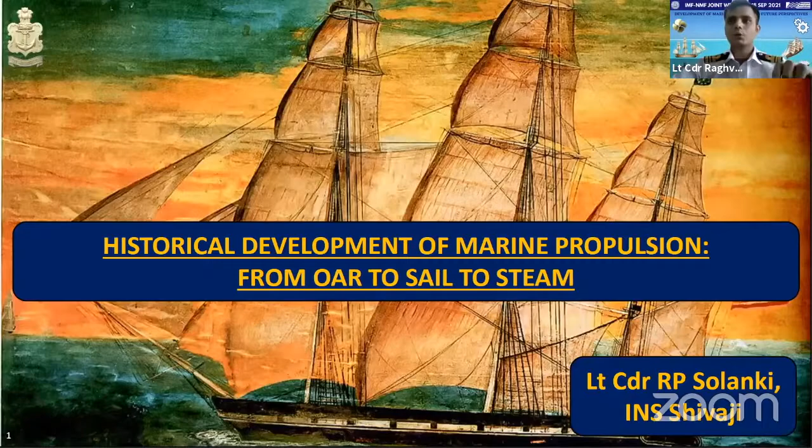The history of development of marine propulsion is filled with tales of great human endeavor and perseverance. I would primarily focus on the historical perspective leading up to the era of steam propulsion, from oar to sail to steam. The scope of the presentation is flashed on the screen.

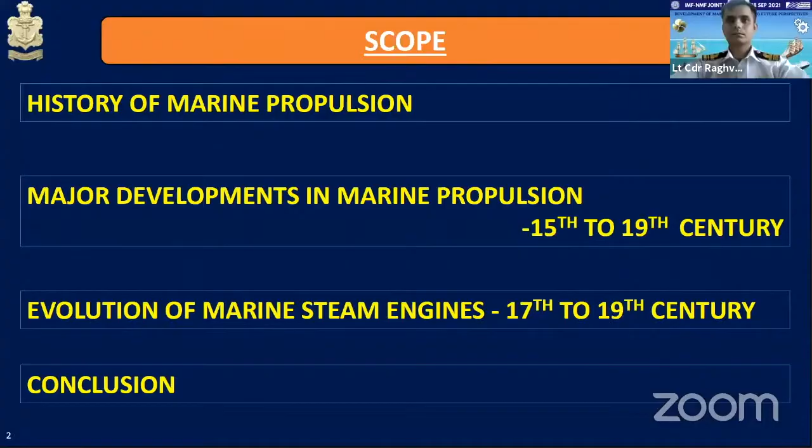First, I will briefly discuss the history of marine propulsion. The earliest historical evidence of the existence of boats has been found in Egypt, dating back to the 4th millennium BCE. Egypt's culture was completely riparian as it existed along the river Nile, and all requirements of the civilization were met by transport through the river.

Because they were confined to the Nile and dependent on winds, recourse to rowing during lull periods was essential. Early Egyptian boats had a single square sail along with one row of oarsmen. The role of the ship defined the design criterion, which still stands to this day in classification of various ships. Fighting ships required speed and adequate space for a substantial number of fighting men. In contrast, the requirement of trading vessels was to carry maximum quantity of goods along with minimum crew.

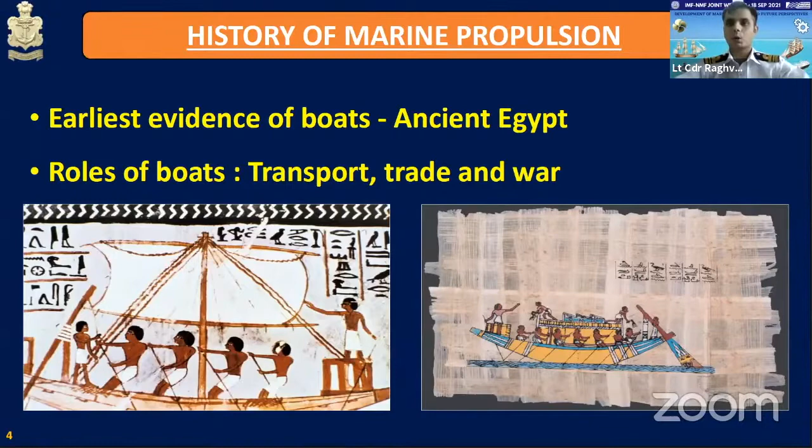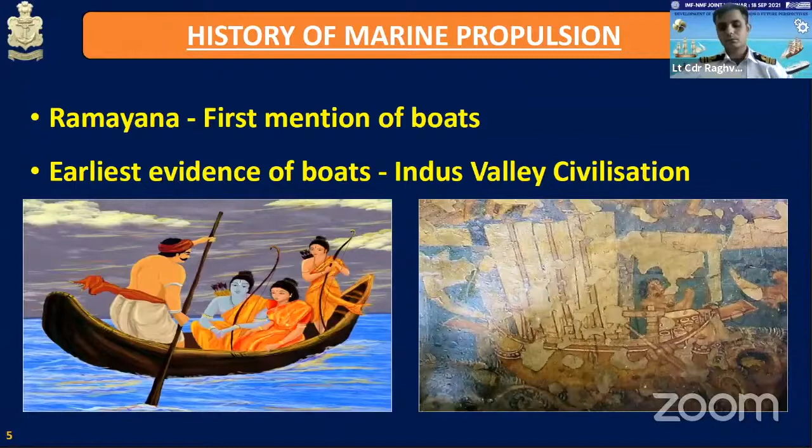As per Indian mythological records, evidence of boats was first mentioned in the Ramayana, where Kevat transported Lord Rama across the river Ganga. As per history, shipbuilding in India goes back to the 3rd millennium BC to the Harappan times, during the Indus Valley civilization. The Harappans built the first tidal dock of the world at the port town of Lothal in about 2500 BC.

By about 200 BC, oared ships were built in larger and larger sizes in the Mauryan era. The wood used was mainly Malabar teak, which was superior in durability. When trade winds were discovered, multi-oared galleys gave way to sail ships.

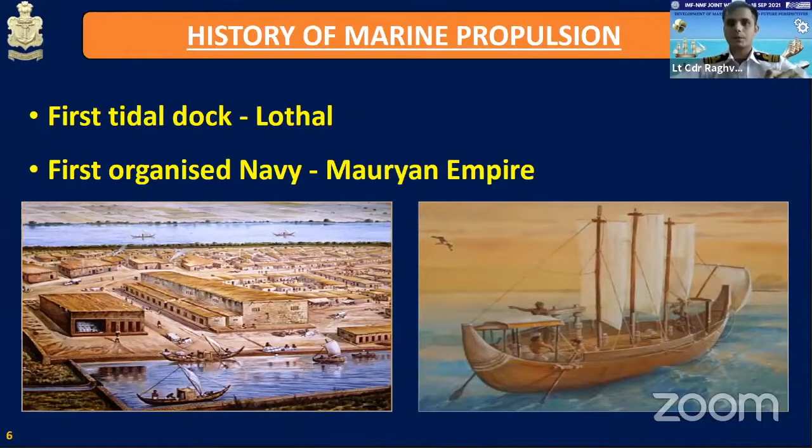Skill of navigation with the use of sails was being discovered in the early centuries, where sailing under following winds was only known to a few seafarers. To achieve better speed, more masts and more sails were required, which provided stability to the ship but also covered larger deck spaces. Two types of sail, the square and the lateen, were extensively used. Various combinations of sail were tried by seafarers over the centuries, but more often, the second mast always carried a square sail.

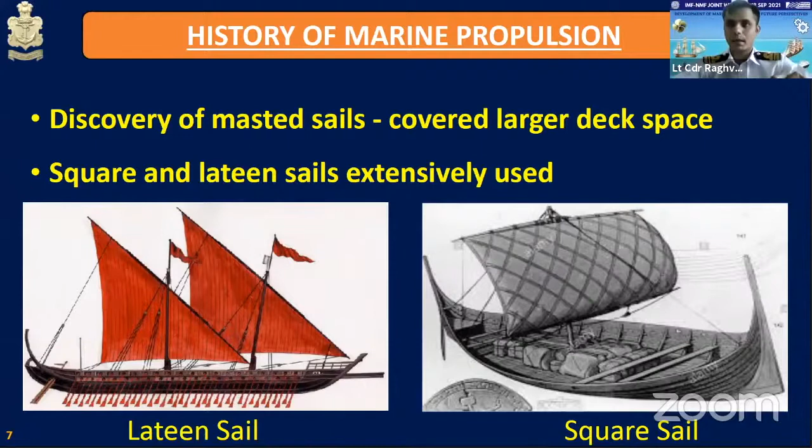The Portuguese are credited with introducing guns on board ships that were constructed in India. The shipbuilding style of the Portuguese was greatly followed by the Marathas in the 17th century. The Gurab and the Gallivat were two prominent fighting vessels of the Maratha Navy. The Gallivat had two masts with a lateen sail and benches for oarsmen. The first keel of the Maratha Navy was laid near present-day Kalyan.

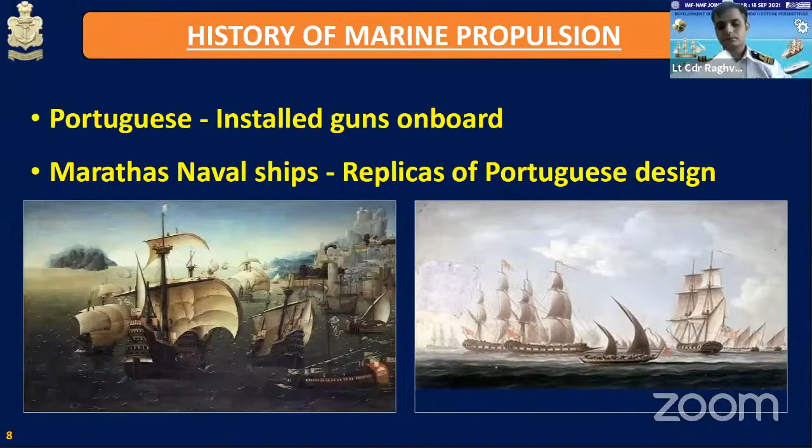During the 18th century, the Parsi community became pioneers in shipbuilding. They built various ships for the East India Company and mastered the art of shipbuilding. HMS Trincomalee, built by the Wadias in 1817 for the British Navy, is still afloat at Hartlepool, England, and is testimony to India's traditional shipbuilding prowess. The Wadias also developed sites for construction of ships at Surat, Daman, and Bombay.

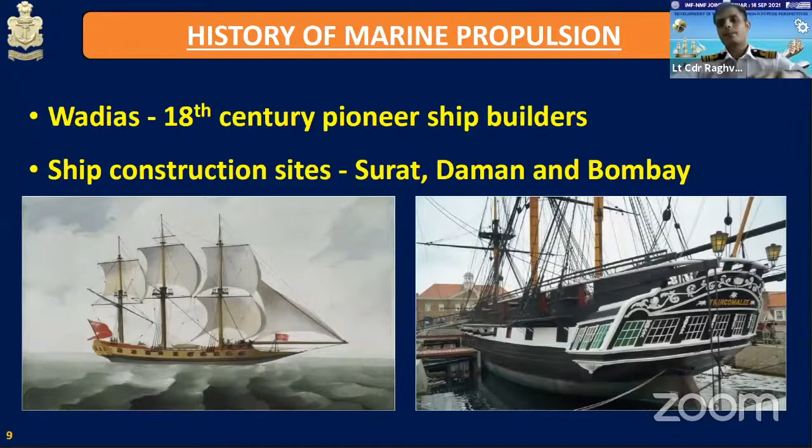Shipbuilding had also developed in China by 1100 AD. Chinese ships were better in design as they provisioned for a rudder along the keel at the stern of the ship, which provided better stability and control.

In rigging, Chinese ships were far ahead of the Western ships, with sails made of narrow panels, each tied to a sheet at each end, so that the force of the wind could be taken in many lines rather than on the mast alone. By the 15th century, Chinese junks had developed into the largest, strongest, and most seaworthy ships in the world. Not until about the 19th century did Western ships catch up in performance to these.

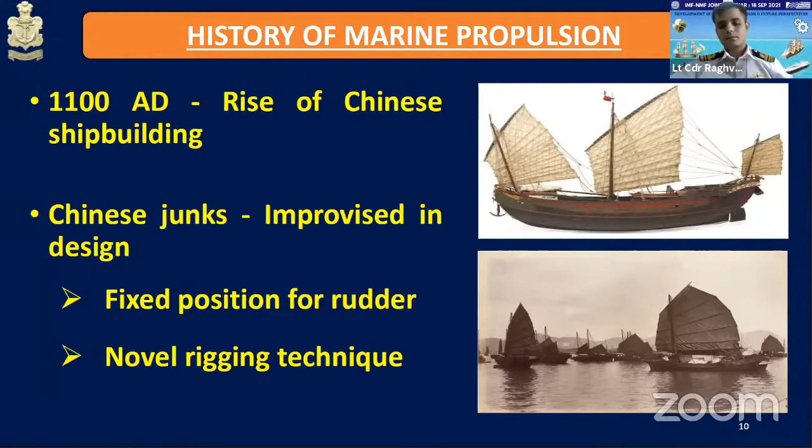Major developments from the 15th to the 19th century will be discussed in subsequent slides.

The early 15th century saw the rise of full-rigged ships because trade was becoming larger in scale, more frequent in occurrence, and more distant in destination. To achieve greater speed, multiple masts with more canvas of sails were added, which made them capable of covering larger distances. To accommodate additional masts, the hull became elongated.

During the 16th century, carracks, which were Mediterranean three-masted ships, were largely in use. As the years passed, the galleon, which never carried oars and was likely to be four-masted, became the most distinctive vessel. During the 17th century, vessels were commonly three-masted in Northern Europe.

The Dutch, competitors of England, were able to build and operate merchant ships more cheaply with half of the crew of English ships. In the 17th century, the sailing ship in general service was predominantly the Dutch fluyt, which made Holland a great maritime power.

In the 18th century, England re-established its prowess over sea trade by extensive studies on material of sail and enhancement in design of the box rudder.

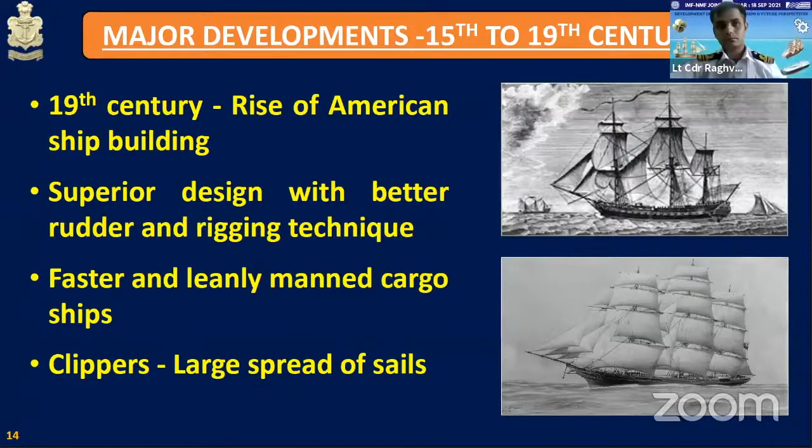Although the use of sails for commercial purposes was phased out by the beginning of the 20th century, leading navies of the world still operate sail ships to impart training to their men.

The Indian Navy also operates two sail training ships, INS Tarangini and Sudarshini, for providing sail training experience to officer cadets. INS Tarangini, commissioned in 1997 and built by Goa Shipyard Limited, was the first Indian naval ship to circumnavigate the globe. Indian naval officers have also circumnavigated the globe on Indian naval sailing vessels Mhadei and Tarini.

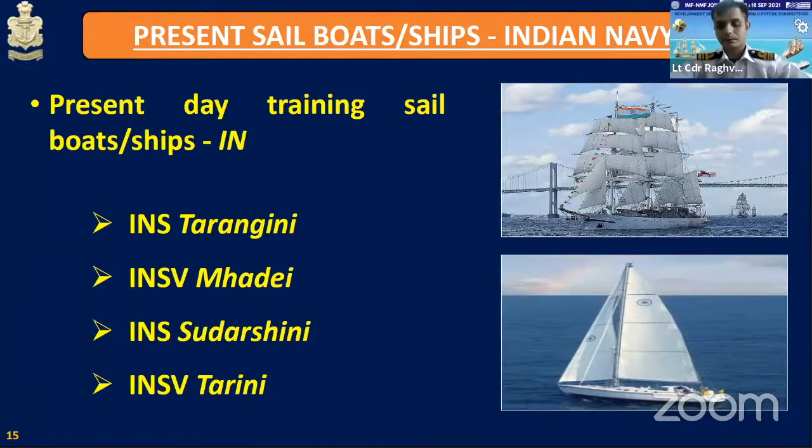Moving on to the evolution of marine steam engines between the 17th to the 19th century.

The main drawback of the sail ship was that as ships grew larger to cater for more cargo, the sails along with handling equipment also grew bulkier. This became cumbersome and problems arose in reliability and maintainability of equipment, thus triggering research in other forms of propulsion.

Along with the discovery of various properties of steam as main propulsion, the design of propeller was also being conceptualized by scholars. Among the first batch of designs, paddle wheels driven by steam engines made their way as propellers for ships in the 18th century.

Initially, two designs of paddle wheel, straight paddle and rotary paddle, were developed. Screw propellers, which were designed by Colonel John Stevens in 1804, faced multiple problems in their initial days.

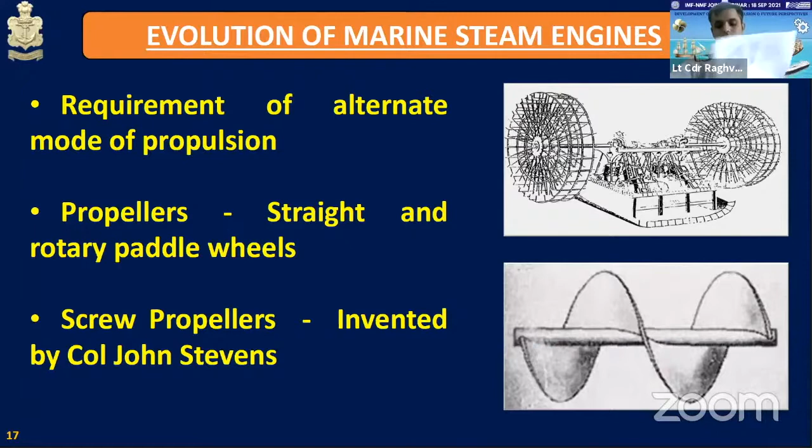The history of the steam engine is linked with the invention of the steam pump. The steam pump was marinized and adapted for use on board vessels as the steam engine. The founder of the steam engine was Thomas Savery, who invented a steam pump that was extensively utilized in the mining industry and was also known as the friend of the miner.

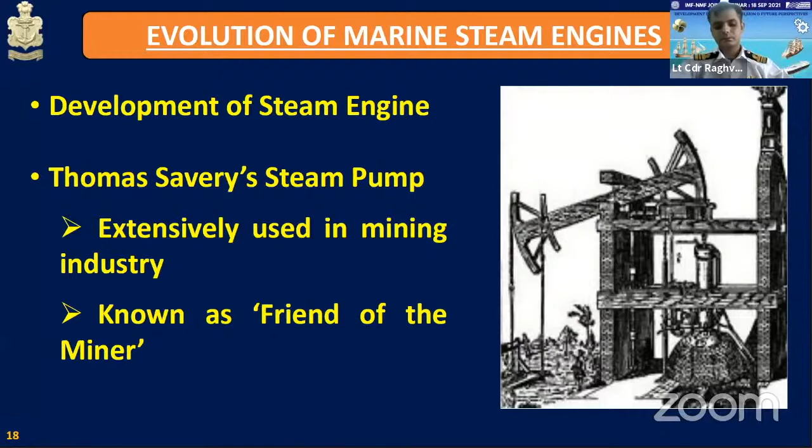Savery's design was upgraded by Thomas Newcomen, whose engine had better efficiency. The engine was self-acting in nature and had an added feature in the form of a condenser that considerably improved its fuel efficiency.

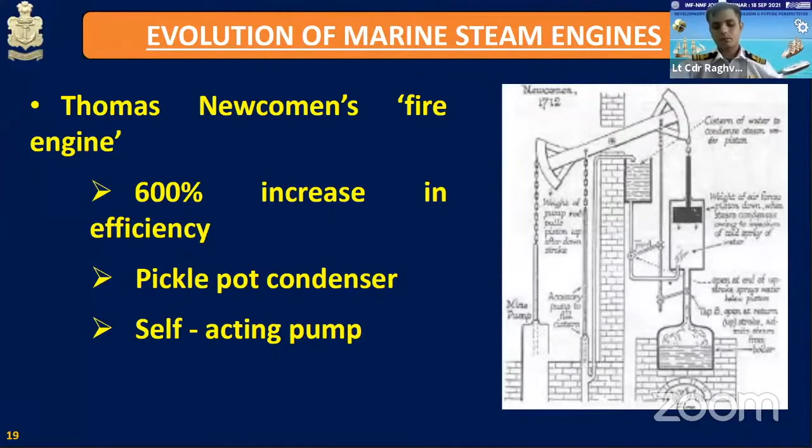James Watt is credited for developing the steam condenser engine in 1765. This was an improved version of Newcomen's fire engine. Watt developed the pickle pot condenser, which was later replaced by the common jet condenser in 1800. This engine, which utilized vacuum underneath its piston, had better fuel efficiency than previous engine designs.

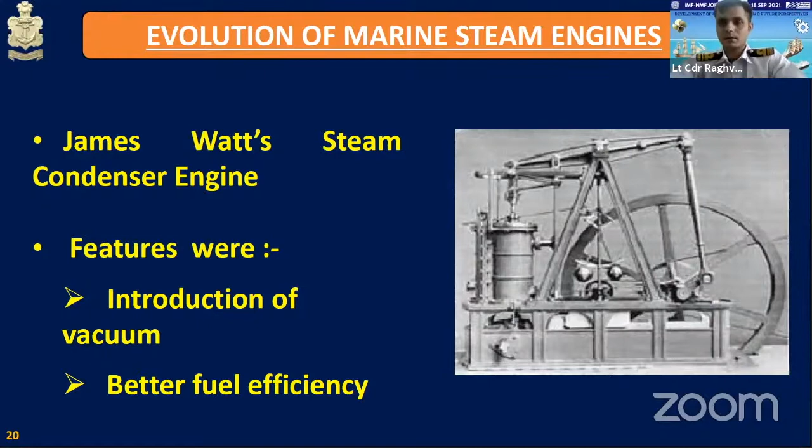On August 9, 1803, Robert Fulton, an American, made history by successfully completing river trials of a steamboat on the river Seine at Paris. The steamboat operated at 3 miles per hour. Fulton utilized James Watt's patented steam engine and coupled it with a rotary paddle wheel for propulsion.

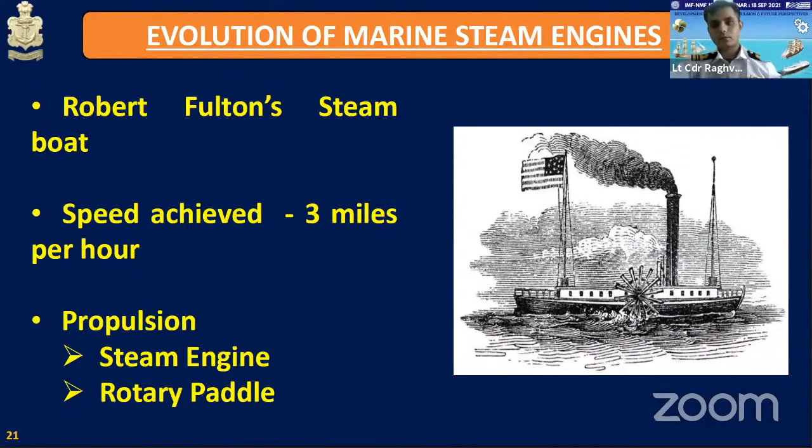In 1819, the Savannah, built by Savannah Steam Ship Company in New York, became the first ship to successfully cross the Atlantic Ocean. The ship was propelled by sails and paddle wheels powered by a steam engine. The engine powered the paddle wheel for a total duration of 85 hours.

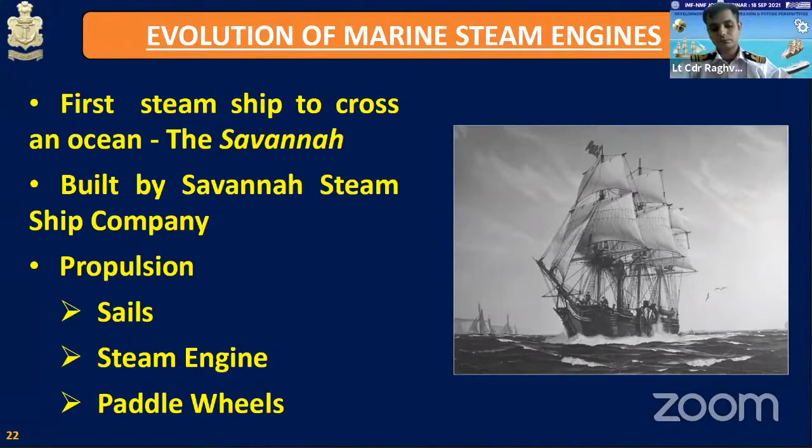The first marine steam engine for cross-Atlantic liner ships was developed by I.K. Brunel in 1838. This engine was installed on board the Great Western, a cross-Atlantic liner of the Great Western Steamship Company. The engine was operated on a low boiler pressure of 5 psi and developed 450 nominal horsepower. The propulsion system of the ship consisted of a steam engine, sails, and paddle wheels.

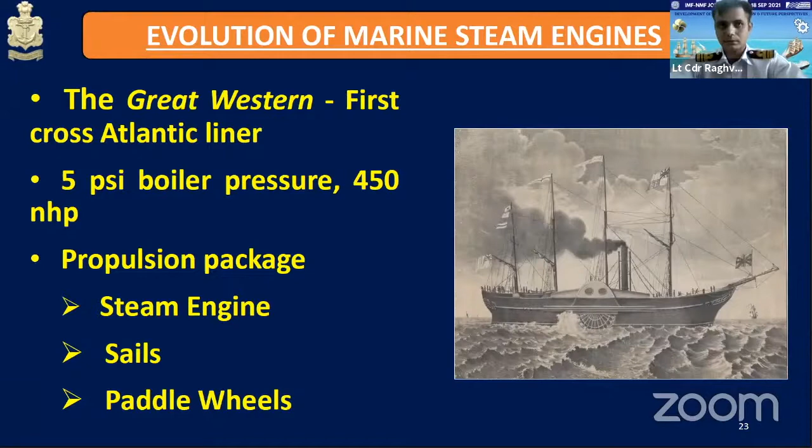The Great Britain was the first iron steamer to cross the Atlantic and was built by I.K. Brunel for the Great Western Steamship Company. The ship was the largest of its time and was propelled by a steam engine connected to a screw propeller. An auxiliary sail was provided for additional power.

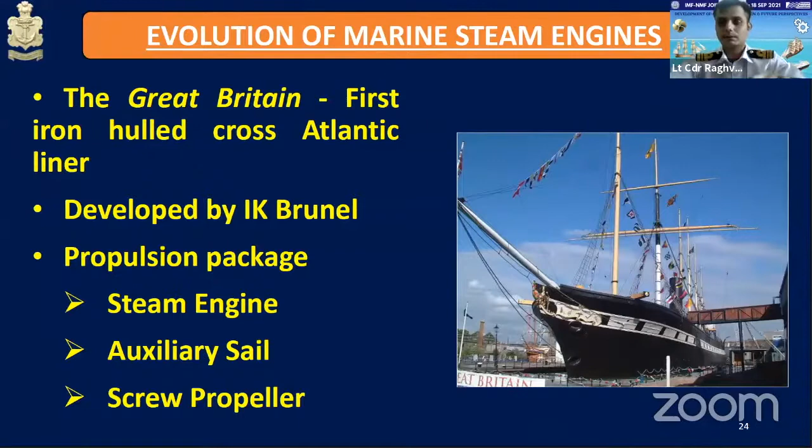Some of the design challenges associated with initial designs of steam engines are requirement of a large engine room as the engine size was not compact, use of only heavy cast iron in engine construction due to insufficient knowledge of metallurgy, problems in connecting pistons and cranks as the technology of bearing materials had not developed, slow rotational speed due to low boiler pressures, high consumption of fuel, and lack of skilled operators.

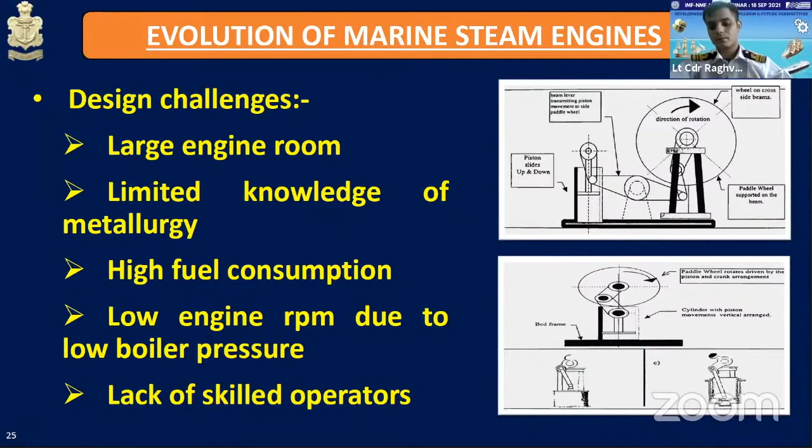Sir Charles Parsons is credited with the invention of the steam turbine. He first developed a turbo generator in 1884. This made way for the development of the steam turbine.

With the induction of the turbine, the speed available was high, necessitating changes in the reduction gear arrangement. The advantages of steam turbine over reciprocating steam engines were generation of tremendous amount of power with fewer parts, high power to weight ratio, and exceptional efficiency.

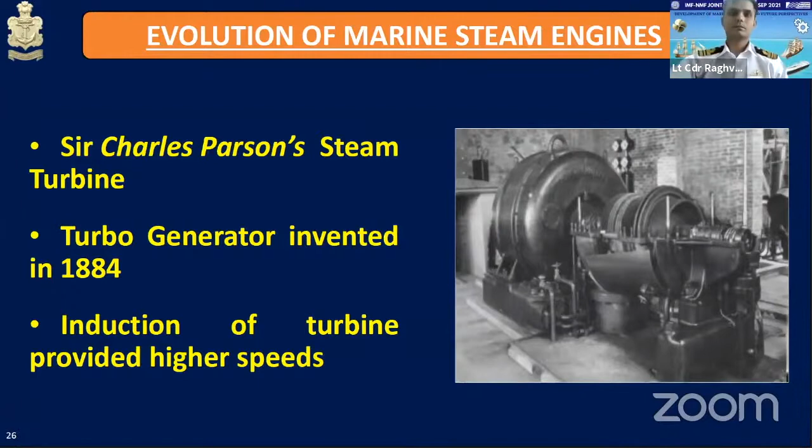The first steam turbine was installed on board SS Turbinia. This radial flow turbine rotated at 2000 rpm. After several trials and improvements, she clocked 35 knots. The propulsion system of the ship consisted of a water tube boiler, radial flow turbine, and screw propeller.

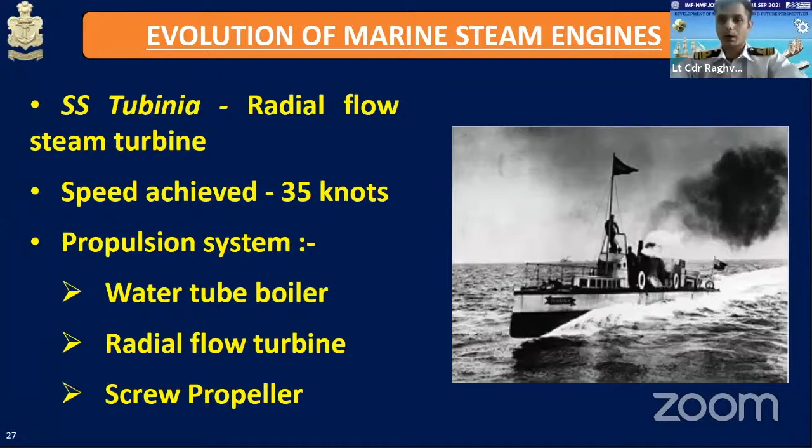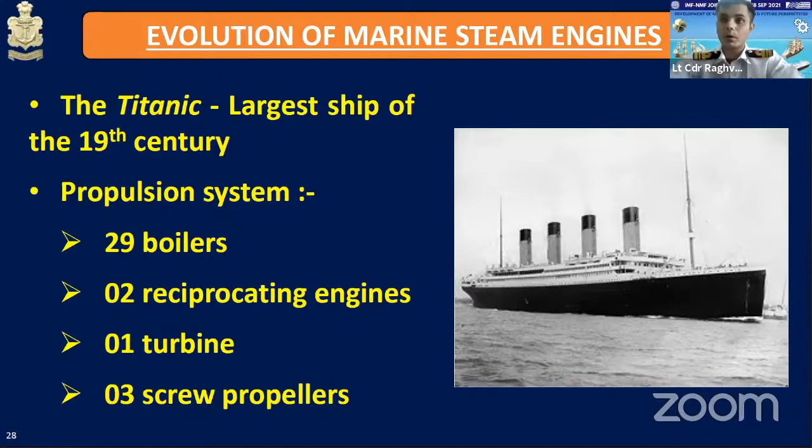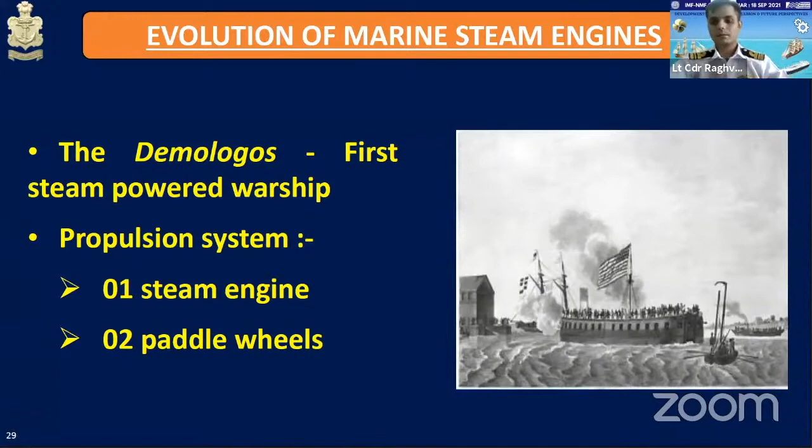Construction of the Demologos paved way for shipbuilders across the globe to develop warships propelled by steam power. Steam propulsion gave warships additional speed, mobility, and maneuverability, thus enhancing the strategic power of maritime forces. Mighty warships, which fought in both world wars, were the greatest example of efficient use of steam-powered engine. Steam propulsion systems have evolved over the course of time and are even today in use by world navies.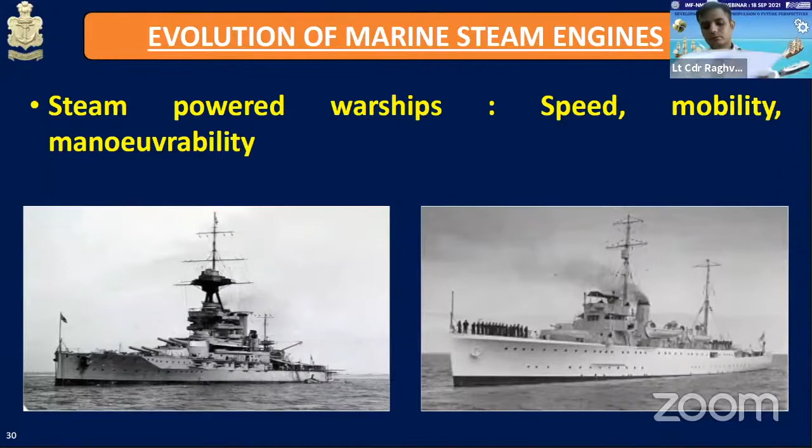The Indian Navy too had operated a number of steamships, including aircraft carriers Vikrant and Virat. This technology is still used on many frontline warships, including the aircraft carrier Vikramaditya.

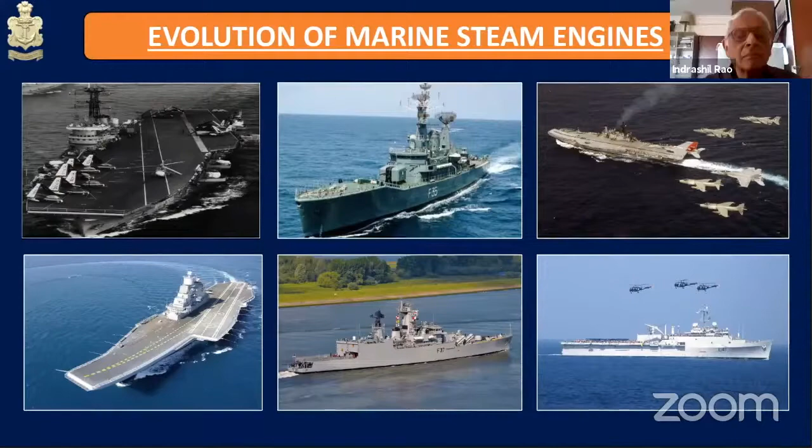The history of marine propulsion has been a testament to the unlimited perseverance and innate inquisitiveness of humankind. This journey of discovery is filled with as much technological growth by the scientific community as the sense of adventure and sacrifice by the seafarer. The growth of marine propulsion has been nothing short of a technological revolution and has been an integral part in the saga of human evolution.

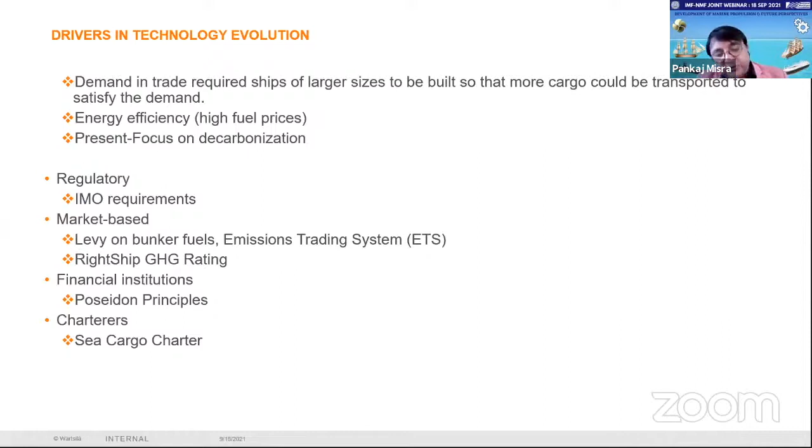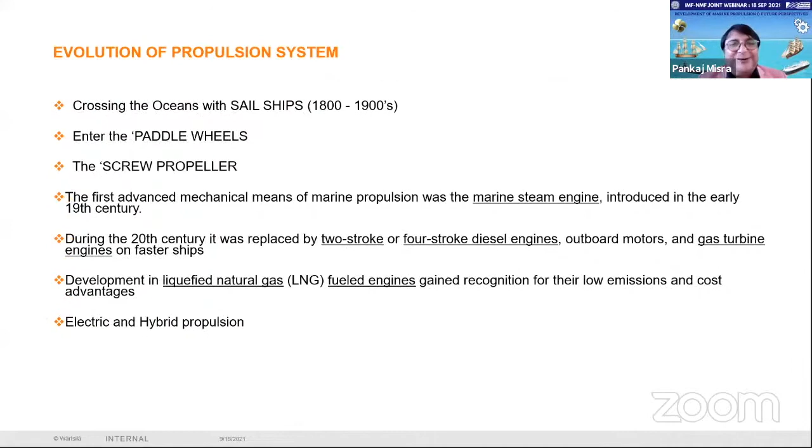I think this part has been very well covered already, so I'll just skip this. I will just touch upon the historical development of the engines.

In 1905, the first reversing marine engine was developed by Sulzer. It led the way to the first valveless two-stroke engines at sea, the 2559 kilowatt Sulzer 4S 6A engines in the Italian cargo ship Romagna in 1910.

Then development took place, and in 1920, Sulzer became a famous name for diesel engines in ships, power plants, and railways around the world.

In the 1930s, airless fuel injection became standard in all engine types, greatly improving their efficiency and reducing their maintenance requirements.

The next step was the development of turbocharging, greatly improving the power concentration of the engines with less weight and less space requirements.

In the 1970s, the first low-speed marine engine in the world running on gas entered service in 1972. The Sulzer 7 RNMD90 engine was running on natural gas in the Norwegian 29,000 cubic meter LNG carrier Venetor.

In the 1980s, we have seen a very important milestone in technology development. This was a radical change in scavenging from loop to uniflow, made in 1983 with the introduction of RTA low-speed engines of 380 to 840 mm cylinder bore, increasing to 960 in 1994.

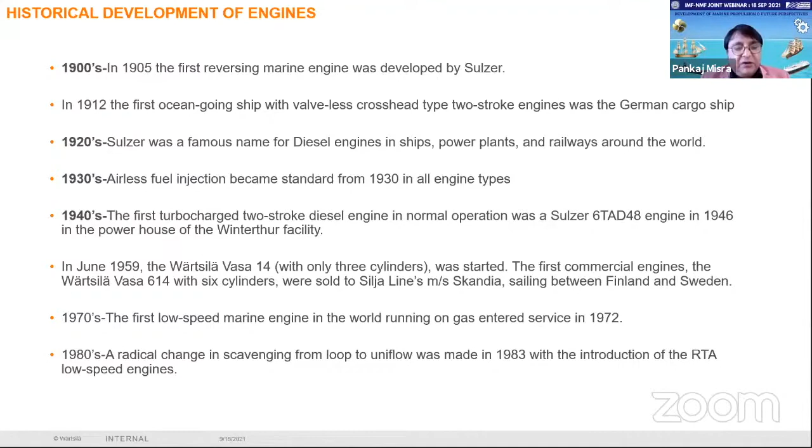Then in 1986, Wärtsilä basically began development work on dual fuel engines. The first concept being the gas diesel engine with high pressure gas injection.

This was followed in the 1990s, wherein the world's first large electronically controlled low-speed engine with common rail injection was introduced, running in the Diesel Technology Centre in Switzerland.

Then in 1991, the development of the Wärtsilä spark ignited engine. Then we have seen the milestone of MARPOL Annex 6 NOx emission levels of Tier 1.

Thereon, in 2000, the first RT Flex entered service in September 2001. The world's largest diesel engines are now the 14-cylinder RT Flex 96C engines, producing up to 80,080 kilowatt. This entered into service in September 2006.

For practical purposes, I have included the timelines till 2015 for this presentation.

Then in 2010, February 2011, the project began to develop the dual fuel engine gas technology for low speed engines, as a solution for complying with the upcoming IMO Tier 3 emission levels requirement.

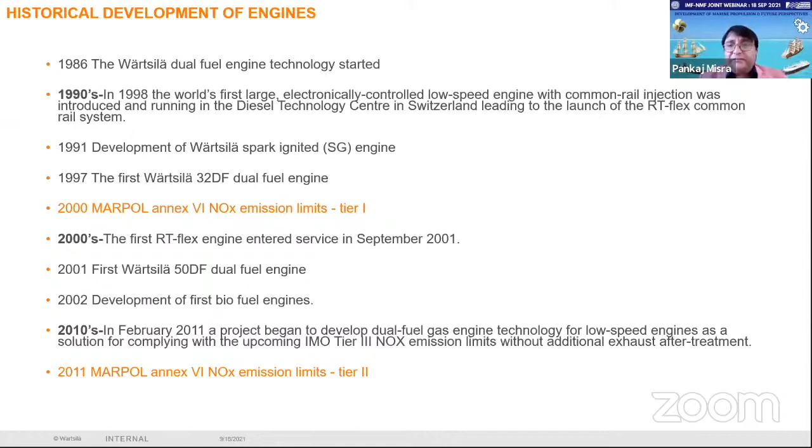Then moving forward, later in 2011, Generation X engines were introduced in the market. These were offering greater efficiency in terms of fuel consumption and emissions, going down further low on the RPM side, and a large bore developed further to optimize on the energy efficiency part.

Then in 2013, the XDF engine series were introduced. These are dual fuel engines using gas admitted at lower pressure and ignited by a low volume of liquid pilot fuel. This was the breakthrough in the marine industry.

In 2015, Wärtsilä converted the first vessel into a methanol-powered commercial vessel. After that, the Wärtsilä W31 was launched. I will cover that part in the coming slides.

2015 also basically released a blending opportunity. This opportunity was from the perspective of mixing 25% hydrogen in the natural gas, applicable on Wärtsilä SG and DF engines.

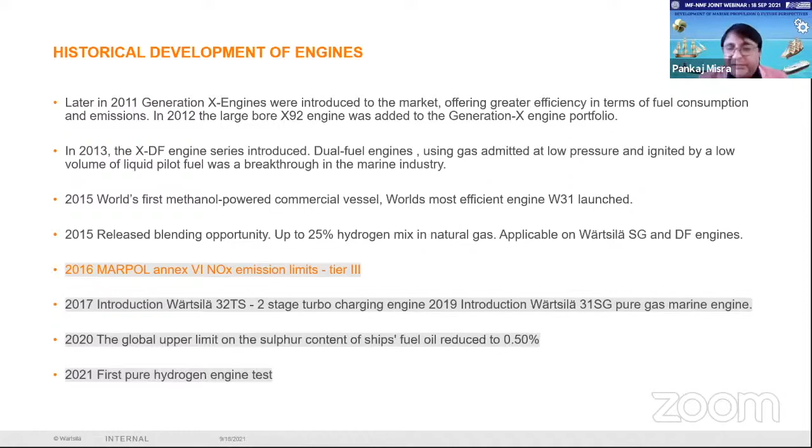I will skip the later part because 2016-17 onwards will probably be covered in the next sessions.

So if you look at the RTA generation, the first RTA generation and the second RTA generation had engines with every cylinder having an individual fuel pump, jerk pump, and developing pressure. The RTA2 generation was additionally having electronically controlled exhaust valve.

Then development took place in 1998, the third generation RT-flex, wherein basically the Sulzer common rail development took place, and this was one step ahead. Here the supply pump was basically delivering 1,000 bar in a common rail, and the injection was through a volumetric injection control unit, VECS. Fourth generation engine, we have further seen development continued on the RT Flex, further developing on lower speeds and larger strokes.

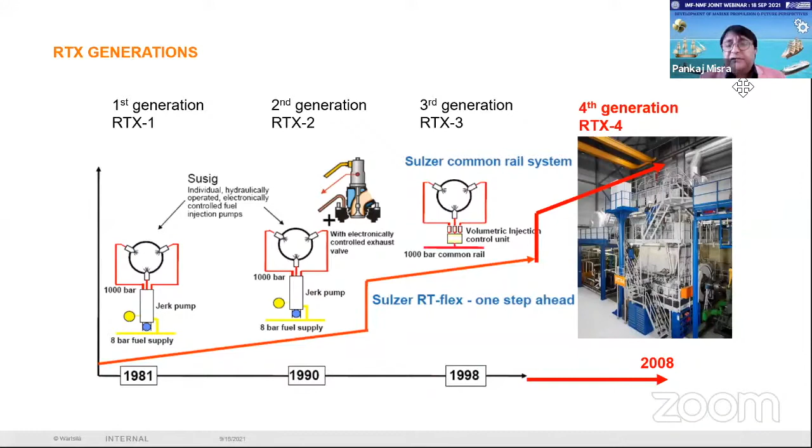So if we look at the comparison between Sulzer RTA and Sulzer RT Flex, the RTA engines had one fuel pump per cylinder, and this had a camshaft system for fuel as well as for the exhaust valve actuations, variable injection timing, and those were part of RC systems. Having the camshaft meant having a reversing servo motor to reverse the engine.

Then in RT Flex, basically the fuel pump was on the supply unit, which was delivering a very high pressure to a common rail, 1,000 bar. And the injection was controlled electronically by the WECS 9520 control system, including the VIT and VECs.

The common rail was beneficial to drastically reduce emissions at part load, specifically reducing fuel consumption also at low loads, with the possibility to further reduce emissions, developed with lower minimum engine speed and high precision on engine related systems like cylinder oil consumption, etc.

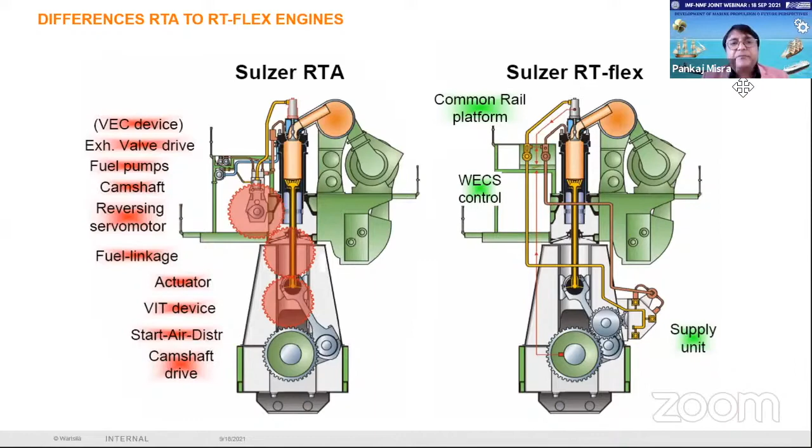Then I will cover the gas burning technologies. There were three gas burning technologies. First, auto engines operating on low pressure gas, which meet the IMO Tier 3 NOx requirement. Gas is mixed with the intake air and compressed in the cylinder. Combustion is initiated with a small pilot fuel injection. This diesel pilot fuel rapidly undergoes pre-flame reactions and ignites due to the heat of compression, just as it would in a diesel engine. The combustion of the diesel pilot then ignites the air-fuel mixture in the rest of the cylinder.

The second is spark ignited, or SG engines. These are the Otto engines, and their emissions are similar to the DF engines. The drawback here was that there was no fuel redundancy, no fuel flexibility.

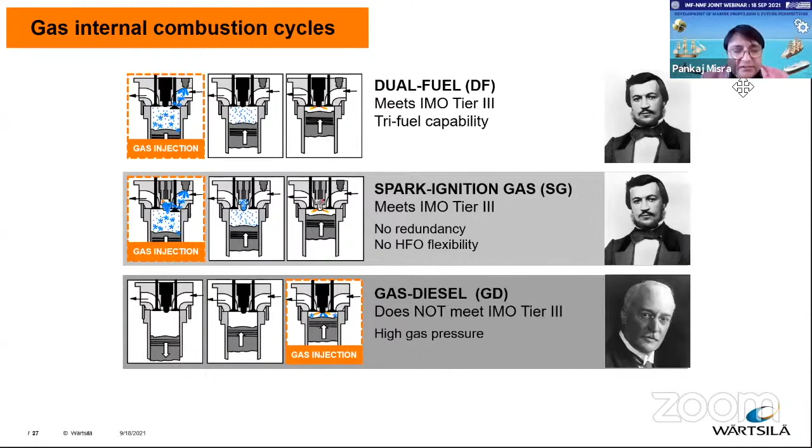The third is gas diesel, or gas diesel engines. In this cycle, the combustion air is compressed and the gas injected under high pressure into the combustion chamber, just like diesel engines. Of course, the Otto engines have lower combustion temperature peaks, thereby producing less NOx and complying with the IMO Tier 3 requirements. This makes the Otto cycle quite interesting.

Now on the dual fuel engines: since the air and primary fuel are pre-mixed in the cylinder, dual fuel engines have many features in common with spark ignition Otto cycle engines, because they rely on the compression ignition of the diesel pilot. However, they also share some characteristics with diesel, as well as some unique advantages.

If we look at the advantages, it gives fuel flexibility. It can run on multiple fuels, including starting, stopping, and maneuvering in gas mode. This is one of the very crucial features. Full gas, full power in gas mode with LNG quality index down to methane number 65. Of course, there's also application flexibility and low exhaust gas emissions.

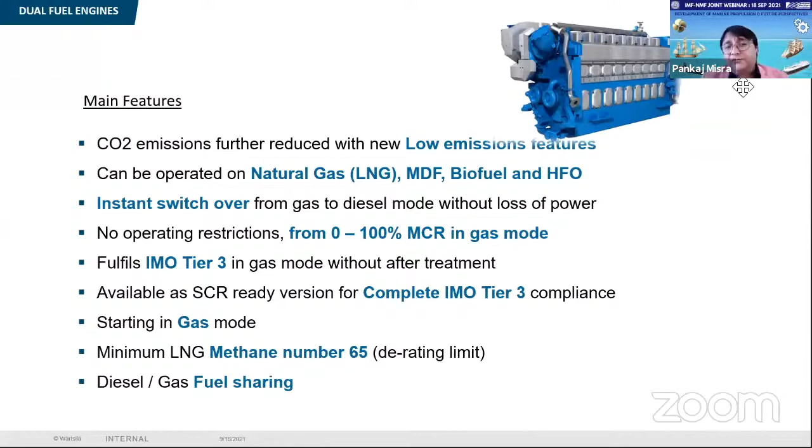This was a low gas feed pressure engine. The point to note is that these dual fuel engines, since they run both on the Otto cycle and the diesel cycle, give enormous fuel flexibility. In the diesel cycle, these engines can be converted to biodiesel, ammonia, methanol, and in the Otto cycle, they can later be flexible with bio-LNG, synthetic LNG, and ammonia. What I'm trying to highlight is that this gives substantial fuel flexibility and a transition technology to the future fuels. So this was the dual fuel engine part.

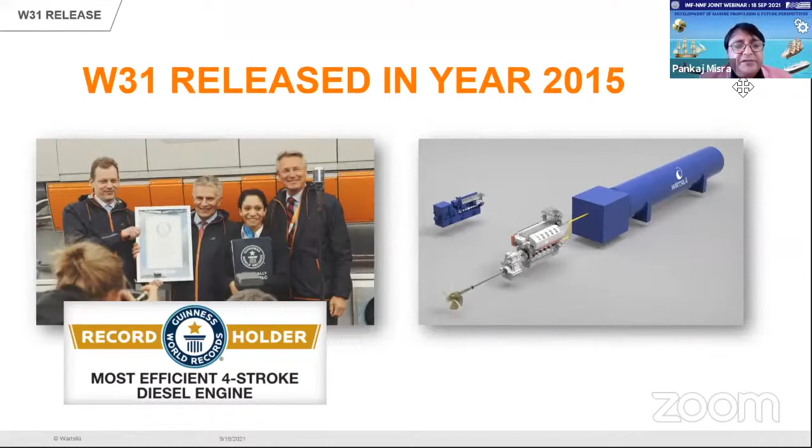Then Wärtsilä 31, which was released in 2015. This represents a new generation of medium speed engines designed to set a new benchmark in efficiency and overall emissions performance. It has the best fuel economy of any engine in its class. At the same time, it maintains outstanding performance across the complete operating range. Through higher power output per cylinder, it enables a smaller footprint and cost-efficient installation.

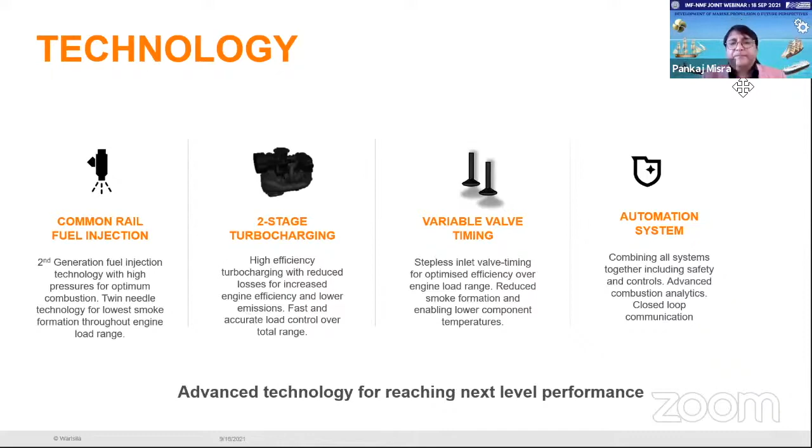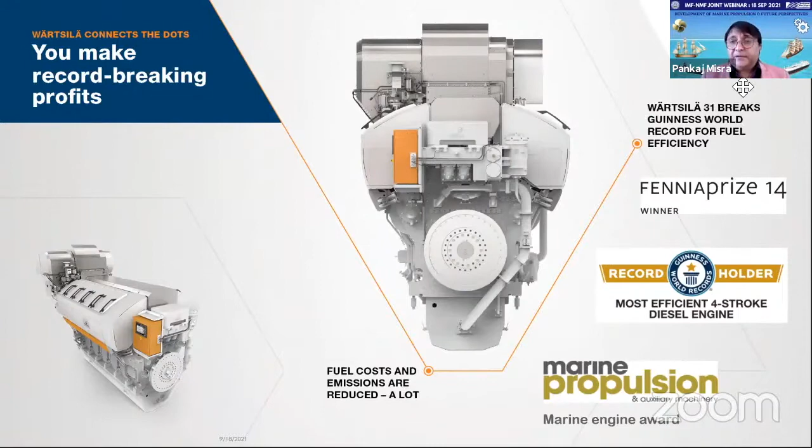Wärtsilä 31 also significantly increases vessel availability through longer time between overhauls, extended up to 32,000 hours between overhauls. The technology involved is basically two-stage turbocharging, common rail fuel injection, variable valve timing, and an unmatched automation system. The engine has won many awards, including being registered in the Guinness Book of World Records for the best energy efficient engine, giving the best fuel consumption.

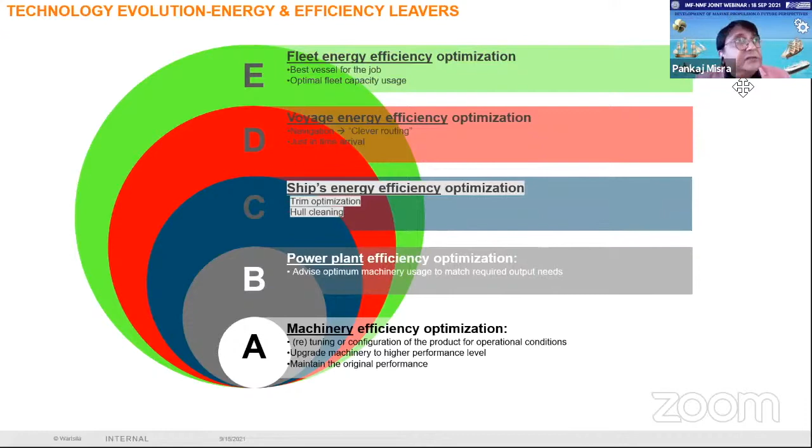Though we have spoken about something on the engine side, now as the second pointer in the driver, which was on the energy efficiency side. The energy efficiency side outlook has become broader in the past, where owners, operators, designers, and the industry started looking beyond machinery efficiency optimization.

It went to the level of ship energy efficiency optimization, then to voyage energy efficiency optimization, where we talk about clever routing and just-in-time arrival, and then to the level of fleet energy efficiency optimization. That's basically talking about the mission profile of the job and the fleet, and optimal fleet capacity usage.

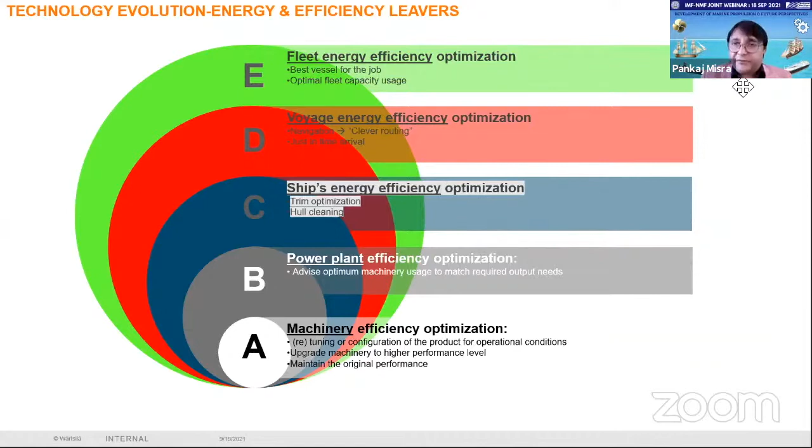So when we look at the operational profile, how the system developed in the past, earlier we looked at design, speed, and draft, then looked at operational profile, and lately we were also looking at potential operational profiles because regulatory compliances were foreseen in the future. This allows flexibility for uncertain profiles and power sources.

I think this topic has already been touched on in the beginning, but what I would like to cover here on EEDI is that the technologies defined in category A, B, and C comply with the various technologies listed on the left-hand side. These are innovative technologies.

Technology category A - these are technologies hydrodynamic in nature and cannot be separated from the overall performance of the vessel, like hull optimization, superstructure optimization, propeller optimization, podded drives, contra-rotating propellers, vane wheel, ducted propeller, pre-swirl device, post-swirl device, and twin skeg. So these cannot be separated from the overall performance of the vessel.

Then technologies category B - these are technologies that reduce propulsion power but do not generate electricity, such as air lubrication systems and wind propulsion. In category C, we have technologies that also generate electricity when going green, such as waste heat recovery and solar power.

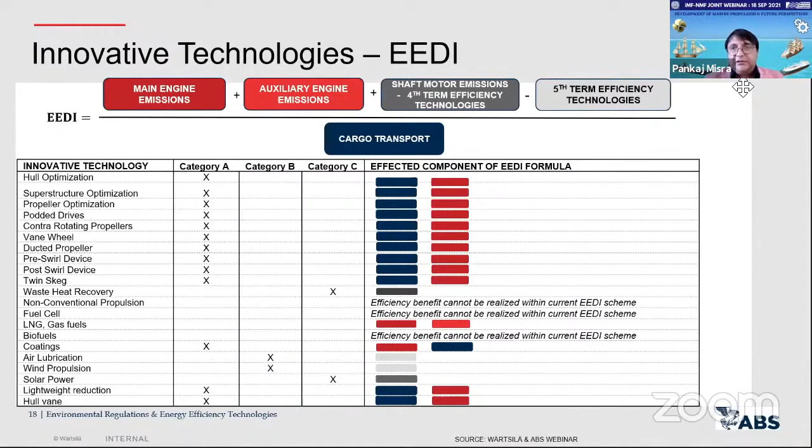So we see how the affected component of the EEDI formula on the right-hand side is influenced by different types of technologies, when we are looking at meeting further regulations and developing solutions at the vessel level.

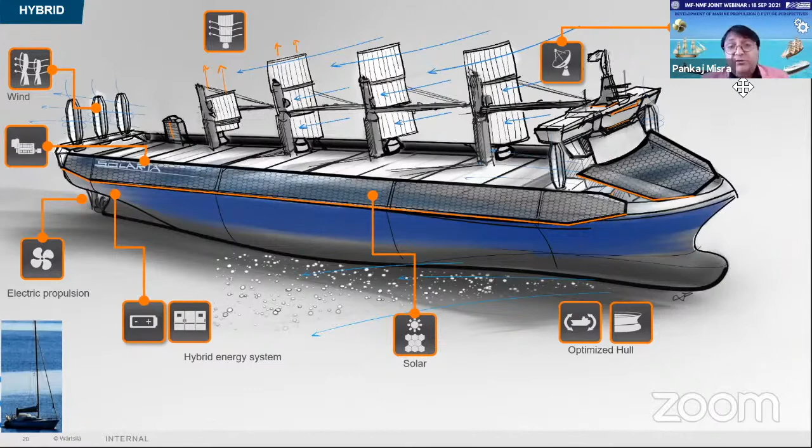Coming to Wärtsilä hybrid - this basically started way back in 2007, when hybrid technology development and its integration began. Hybrid is the integration and combination of mechanical, electrical power and other energy sources like solar, wind, and energy storage devices. This significantly improves efficiency by running machinery at optimal load and absorbing many load fluctuations through various flexible power sources. The system is designed and integrated to optimize the overall operation of the vessel.

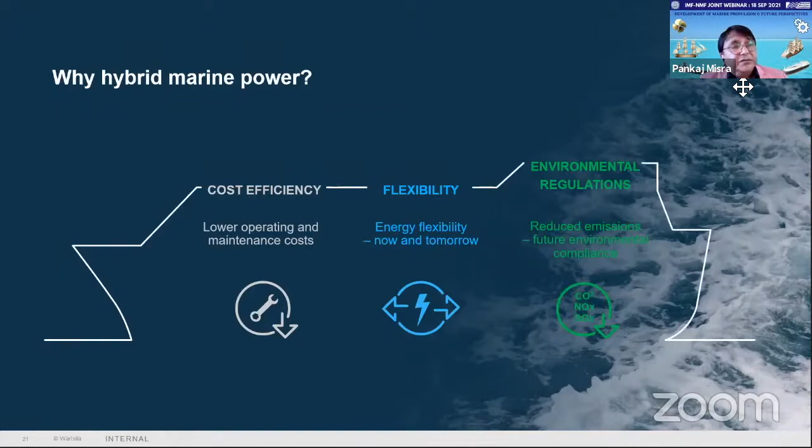So now, why hybrid marine power? The benefits of Wärtsilä's hybrid solution are fuel efficiency and savings, reduced emissions, optimized engine performance, reduced engine transient loads, increased redundancy and efficient operations, reduced maintenance, and increased performance. These are the aspects hybrid marine power covers, offering substantial flexibility.

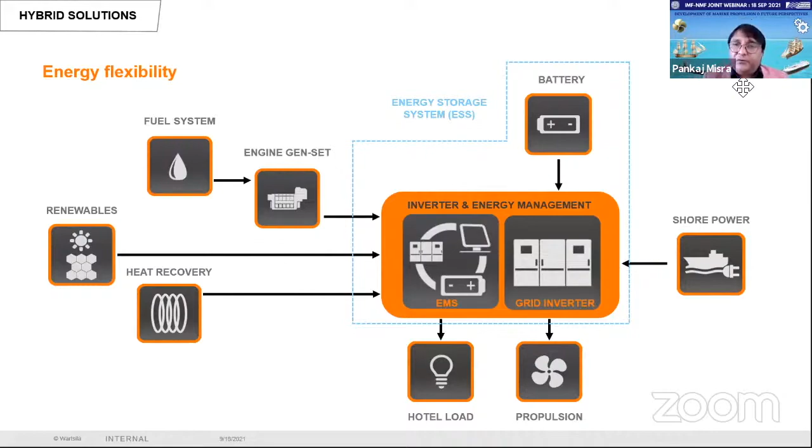If you look at this schematic, on the technology front we have an inverter and energy management system. This energy management system is a key element in hybrid control algorithms for load sharing between units, and for efficient power and energy management. This is the brain of the complete system, integrating energy from various sources. The idea is to map the mission profile of the vessel and back-end design the system accordingly, to see how more flexibility and energy efficiency can be brought into the overall design.

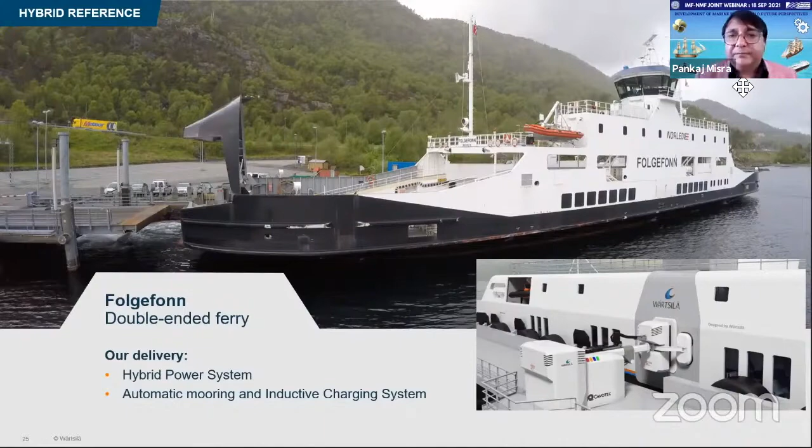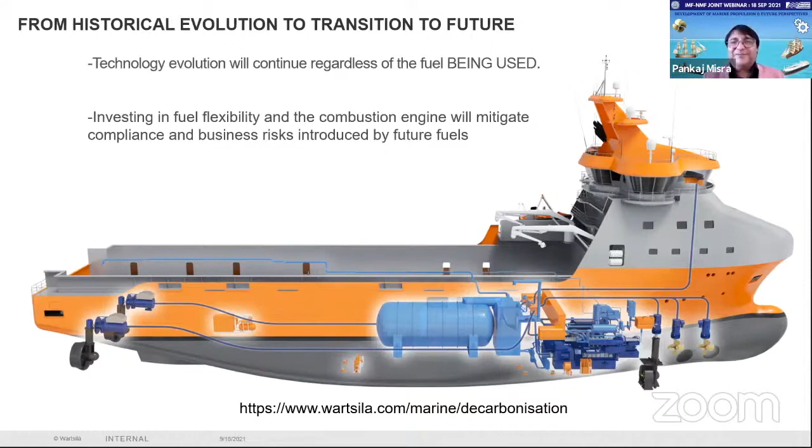And then these are my contacts. You can get in touch with me for any further queries and questions later on. Thank you so much for listening and patience. Look forward.

Thank you, Mr. Pankaj Misra, for such a brilliant exposition. I must really congratulate IMF and NMF for giving us this opportunity to listen to people like you, who must be bursting with ideas for the future, and had such enormous knowledge of the developments. And I think that we've all learned a lot.

There's one question from Mr. Sudarshan Pawar saying, how do you address methane slip in DF and LNG engines, because if you have dual fuel? So these are questions which I hope the organizers will allow us to listen to the answers. But since we are going into session 2, we will leave the answers till later.